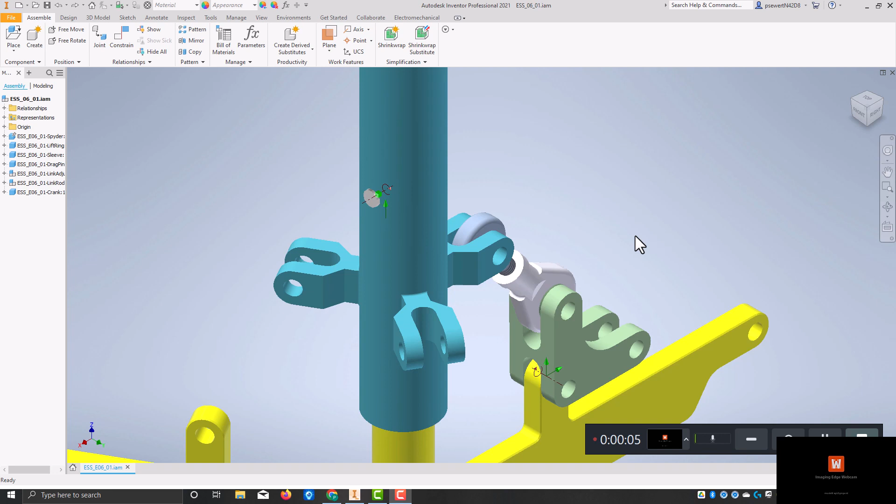Okay, now we are going to be on page 288 in my book, and we're going to add what's called the claw. And the claw goes out here on the end of this yellow part. So I go up to place, and I'm going to find the claw, and I'll click on that once and say open, and this is here. I'm just gonna place this right now, and then I can hit escape to stop placing this.

And you'll see this comes in and it's got our degrees of freedom on here. Now, this has to turn so that this ledge here is facing the inside. So we're going to use a tool here called free rotate. So go up to your assemble tab, and down in the second box over you'll see position. There's free rotate right there, and I'm just going to click on that item.

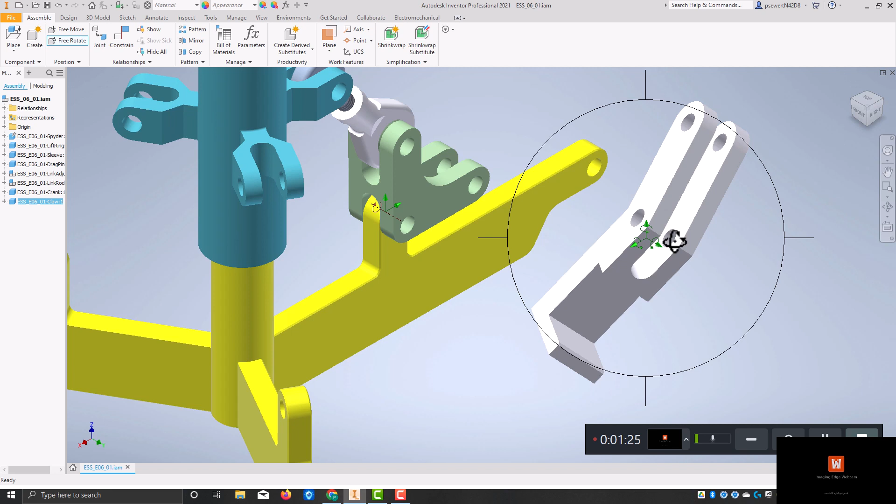And if you're looking in your book, you're going to see the way that they recommend you set this up. So basically, they flip it around so that you can see the inside of this hole right here. So right now, I can see that hole on the inside right there. So let's go with the next thing.

So let's see, circles and lines through quadrants, click and drag and move on until you can see the inside face. Right click it and say OK from the marking menu.

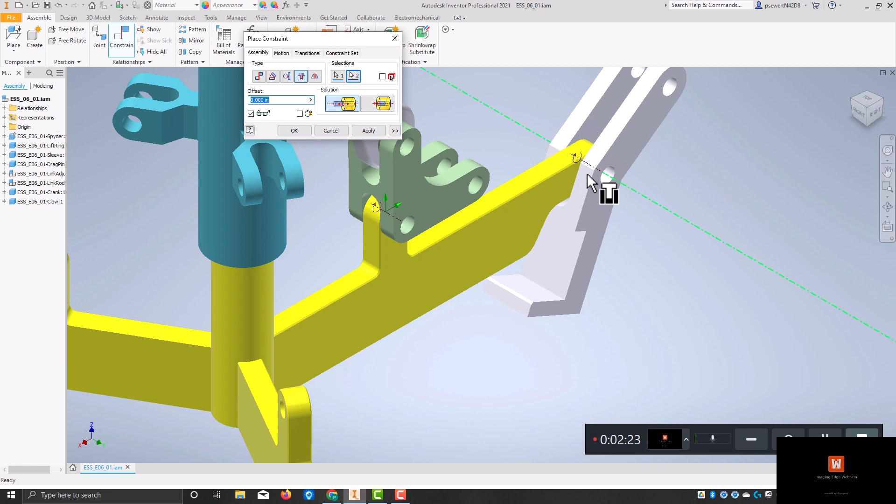Okay. Now I'm going to constrain the claw onto the spider arm, and how I go about doing that is I hit constrain. I'm going to use the insert tool, I'm going to select the inside lower hole right here, and because this is the surface that I want it onto, I'm going to click the hole right there, and I'll click that and hit apply, and we'll just move that down so that we can see it, and I'll cancel it.

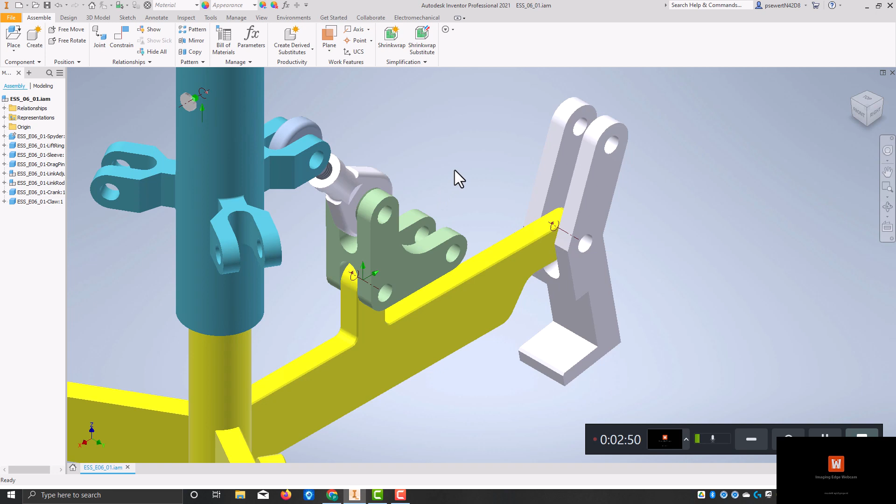And what you'll notice is that this is going to pivot around the axis that goes through those two holes. Now we're going to line up this longer link also. So I'm going to click on this and just bring this down right to here. And I'm going to pause for a second so I can do a little bit of reading ahead, just to make sure I do this similar to what they show us.

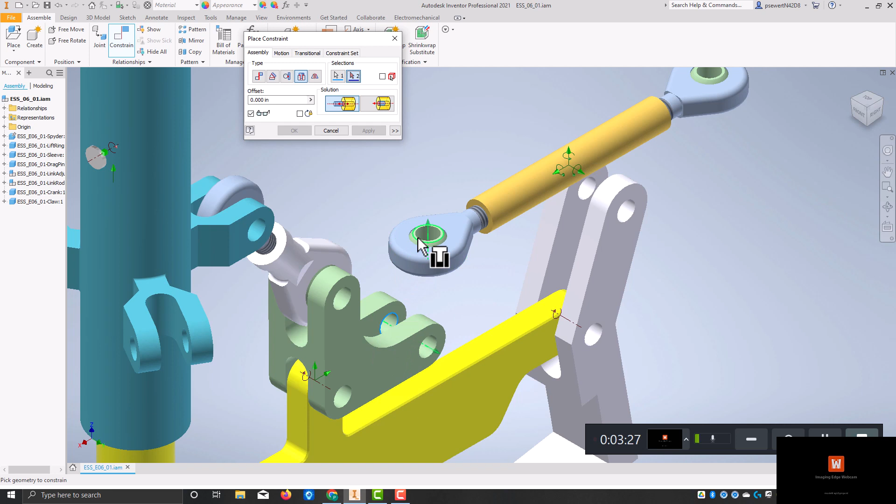Okay, so here's what we're going to work on. We're going to do the constraint, and I'm going to use the insert tool, and I'm going to click this inside surface on the left hand side of this component, and the circle on this buckle, and I'll click that, and it popped it together. I'm going to hit apply. Now let's do something here. I'm going to cancel this.

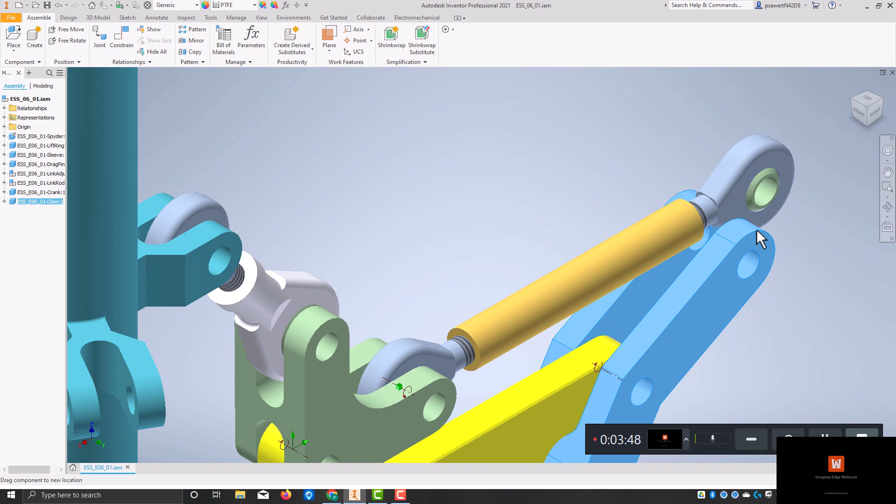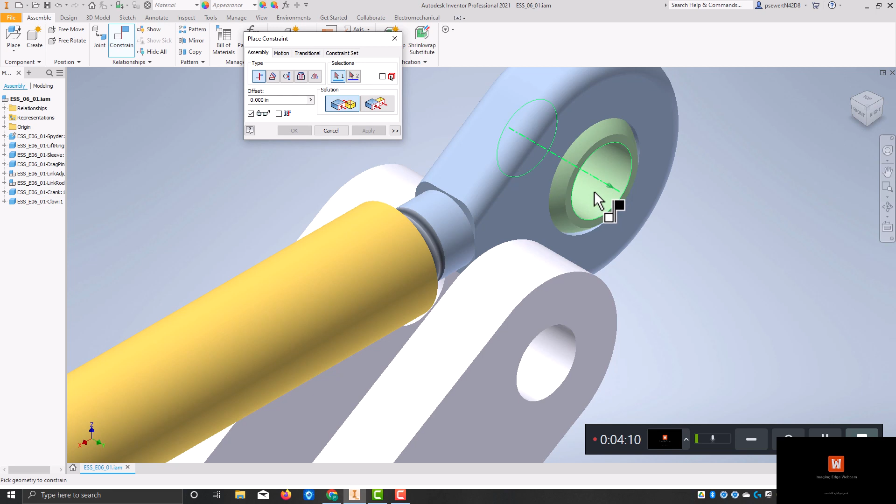I'm going to show you something. I'm going to move this out just so that it's a little bit closer, and pardon me, I'm going to use a mate constraint. So I'm going to hit constrain. I'm going to do just a regular mate, just like we've done before. I'm going to click the inside barrel of this thing and the inside barrel of that hole, and you'll see it snap over. And now let's go see what that did.

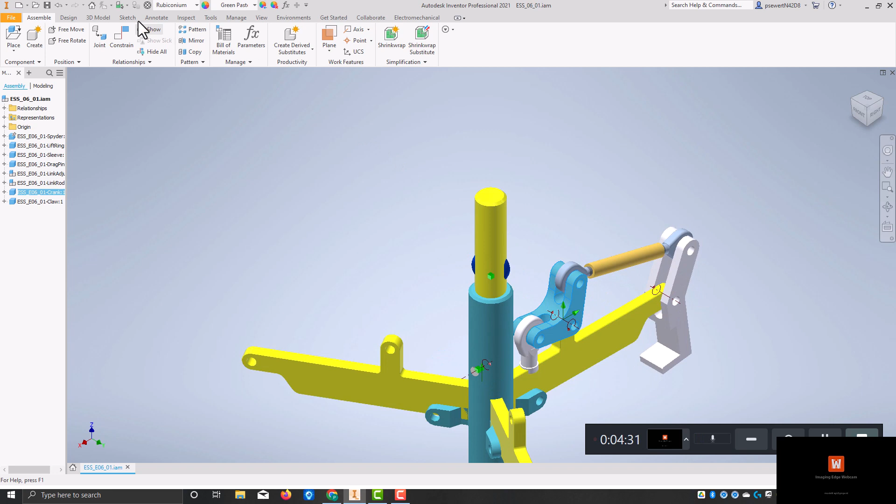Oh, well, it changed the position of this. Okay, so I'm going to hit escape a couple times, and I'm going to click on this, and what you'll notice is it goes all wonky on me here. I'm going to undo that.

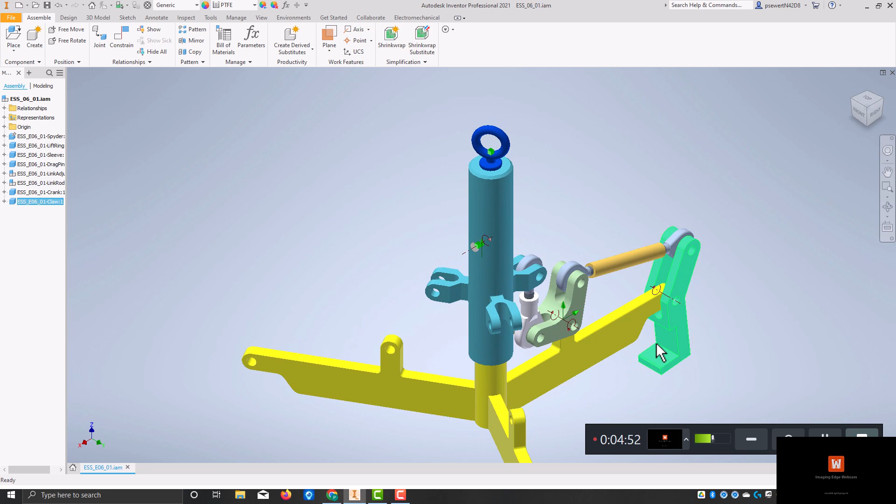And when I take this, what did we call that thing, the claw, and just move it out, you're going to see that we have motion here between the claw, this L-shaped bracket, this short one, and this guy up here. It goes back and forth a little bit. Okay? All right.